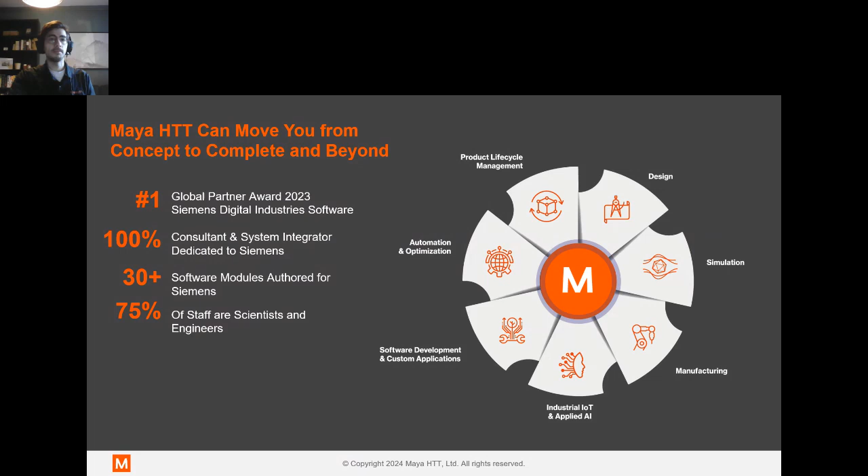In terms of Maya itself, over 75% of our team are actually scientists and engineers with a lot of hands-on experience that would span nearly every industry. So if you're an organization that's looking to better design, better simulate, improve your manufacturing processes, or just optimize your overall operations, our combined expertise in engineering software, software development, and our unique AI expertise positions us really well to help you move from concept to a completed project and even beyond that.

A little bit about myself. You already heard my name is Anthony Lorella. I have been a simulation specialist at Maya HTT since 2015. My background is in mechatronics and system simulation, across multiple industries. I received my Bachelor's of Engineering from McGill University, which is in Montreal, Quebec, where I live now and where our Canadian headquarters is at Maya.

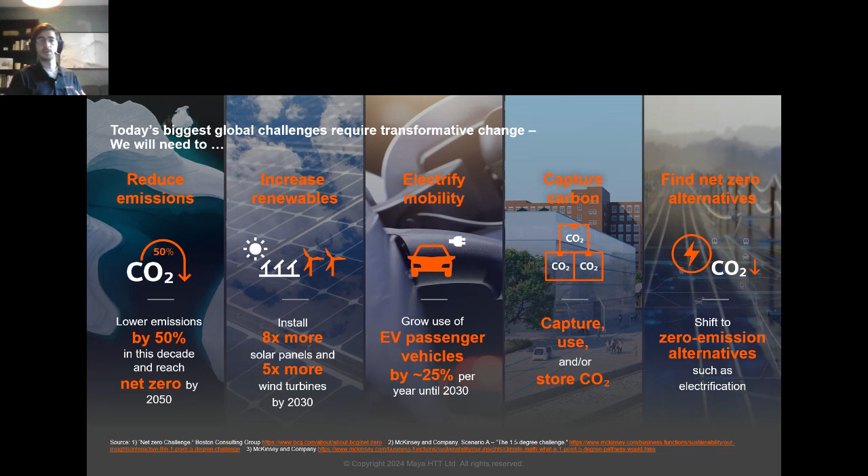Onto the topic of today's discussion. Generally, like I said, we're looking at the development of offshore assets specifically for the production of green hydrogen. As a lead into that topic, there are a lot of different motivations that bring us to explore different energy sources, from reducing emissions to de-risking operations and saving on operating costs. For all of those things, simulation has a part to play and can allow us to innovate.

One of the main goals of simulation is to increase the efficiency of the design process and allow engineers and analysts to understand the behavior of their system early in the cycle and make informed decisions. Ultimately, the end effect of that process would be reducing things like capital expenditure in building and commissioning equipment, but also reducing overall operating expenditure from running it. We'll have a look at how that comes into play in just a second.

In order to generate this green energy, the green hydrogen we're talking about, specifically green hydrogen being the one coming from renewable sources, several sources can be considered. We have things like wind turbines, solar panels, maybe some less common like wave converters. To improve efficiency, these different energy sources can be mixed together to improve both performance and reliability. This energy can be used directly, but the power demand of production doesn't necessarily always correspond to the fluctuating power coming in from those sources. Obviously, all of those are dependent on weather patterns, so they are not going to be consistent.

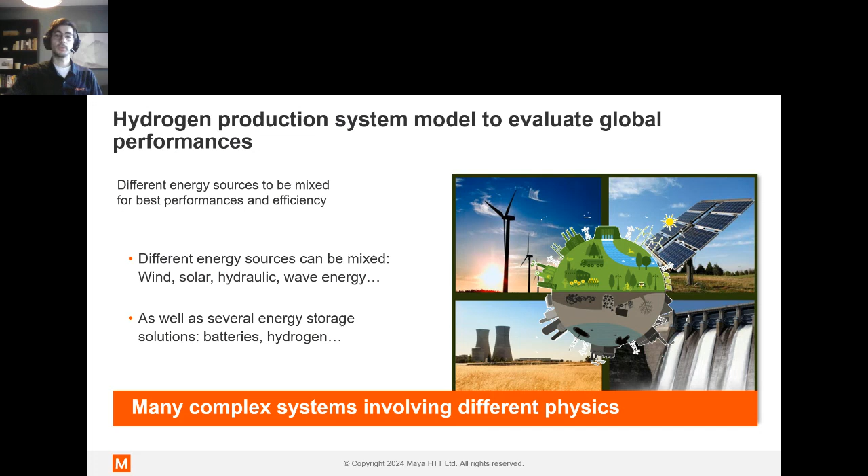But energy storage is also possible. For this purpose, we're going to be using an electrolyzer to produce hydrogen and then also a system to pressurize and store it for later usage. So from end to end, those are the systems that we'll be looking at today.

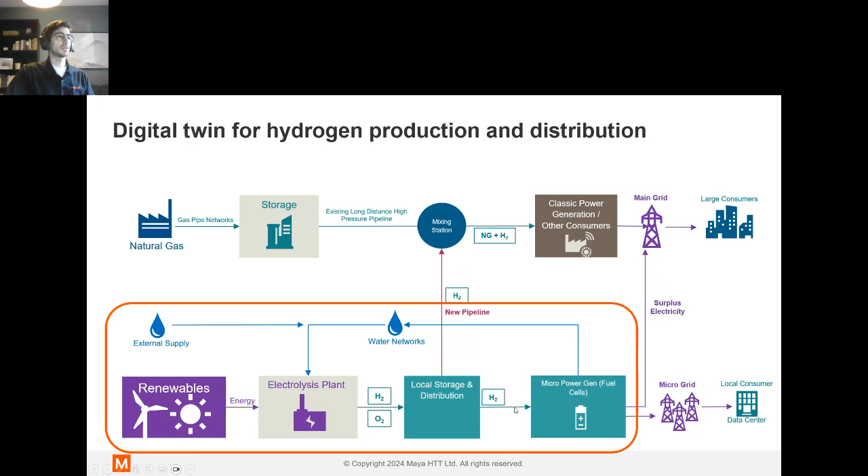In terms of what we describe as a digital twin, we could pretty much extend the capabilities of simulation to all parts of the hydrogen production and distribution process. But really our main focus is going to be everything in the orange box that you see here, up to and not necessarily including the micro scale power generation, like fuel cells or things like that, whether those are transportation based or stationary. So more like the boxes you see here, up to and including storage and distribution.

So, like I said, we're using multiple energy sources. We're combining with electrolysis and hydrogen compression. This makes the system, or the part of the system that we've framed in our question here, quite complex, and it involves a lot of different physics.

That's typically an application where simulation can become very useful. We can capture the behavior of each subsystem in order to better integrate and control them. The idea would be to predict interactions and improve the global performance.

There's a lot more that we can consider, but you get the idea from some of these questions, and these are all questions that ultimately can lead to being answered by a simulation model.

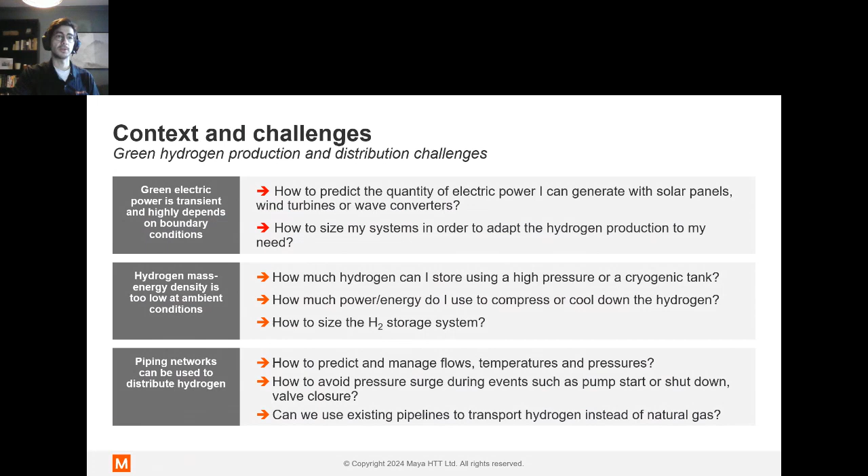So the models themselves are dynamic and complex. That's kind of what it boils down to. When we look at systems simulation, they're very well suited to dynamic and complex systems. And when I say complex, what I mean is multi-physics.

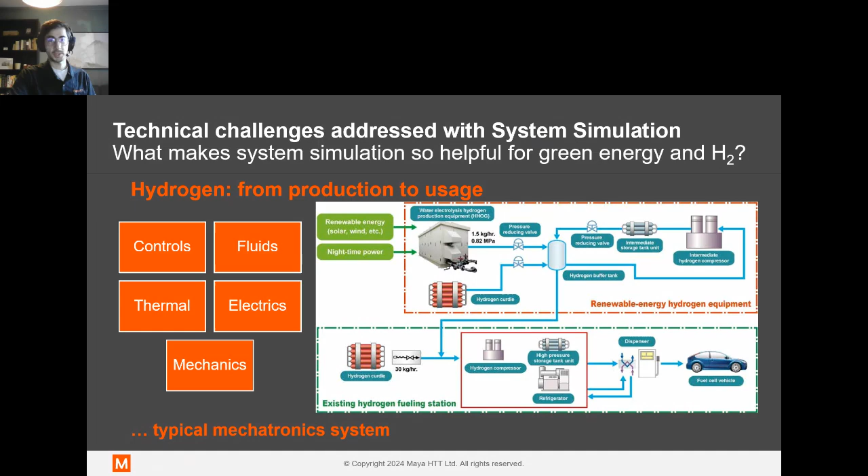So when we talk about system simulation, or sometimes referred to as 1D simulation, we are talking about usually the intersection of a lot of different physics. In this case, for example, we're looking at fluids, thermal, electrics, mechanical systems as well, and also the controls that will go in and form all of those.

So there's a lot of challenges with that, but system simulation is positioned very well to answer all of those challenges. Obviously, we have the ability to combine all of these physics in one model. The way we do this specifically with our system simulation tools is using ready to use off the shelf components that are validated by the developers and engineers. And those span various libraries, which we'll see in just a second.

The models themselves are, like I said, dynamic in nature. So those are off the shelf components which have the equations of physics behind them, and those are the transient behavior equations of physics for all of the different components that you would need across those different physics domains. There's also handy post-processing tools that allow you to go and, after an analysis, make a good informed decision on the overall behavior of the system.

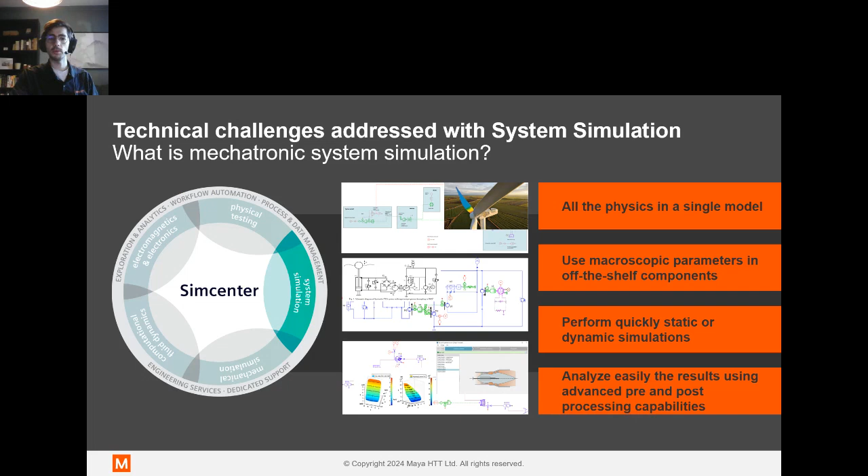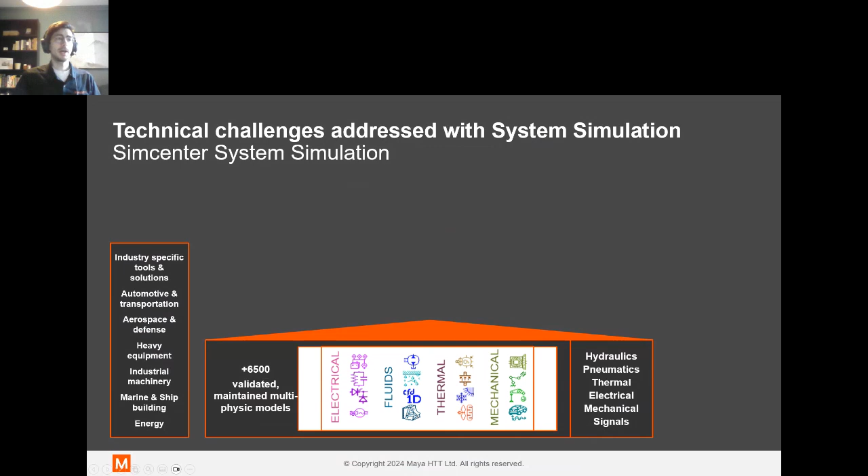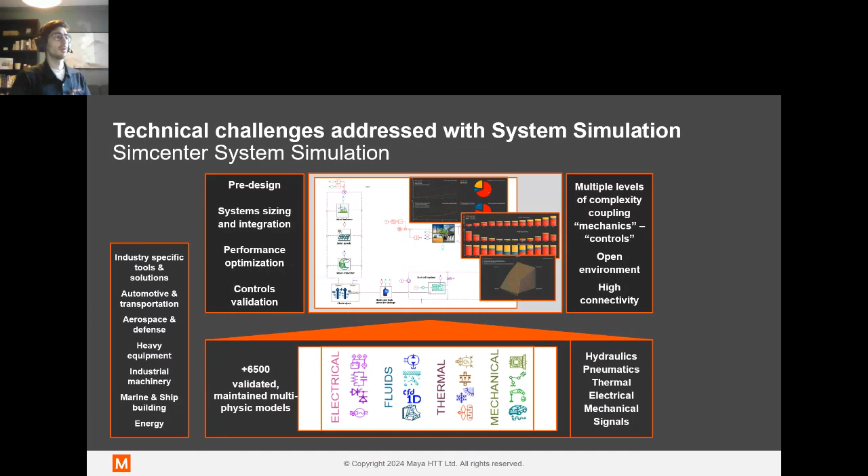And within them, we have over 6,000 validated multi-physics models that you can use and put together to build pretty much anything. There are different levels of complexity, so this can be used at multiple points in a project at different levels of maturity, for either pre-design all the way down to performance optimization and controls validation.

And then there are a few extended uses, things like interfacing with other code like CFD. The PLC interface capability makes it possible to couple these system simulation models with PLC or automation code, either in a software in the loop or hardware in the loop environment, depending if you have a real or emulated PLC that you need to virtually validate. There's a lot of other interfaces and capabilities, but those are some of the bigger ones that we can cover in a bit more detail in just a second.

So onto the model that we're talking about, for the purposes of the green hydrogen production. In this case, this is a large-scale overview of all the different subcomponents that are in our offshore hydrogen production asset. This one includes, like I said, 3 different green energy sources: wind turbines, solar panels, and the wave converter. These are feeding power to an electrolyzer, and then that will produce hydrogen, which will go to our pressurization and storage subsystem. Our focus will be on the 3 energy sources and how they behave, and how, in the end, those can influence the production of hydrogen overall.

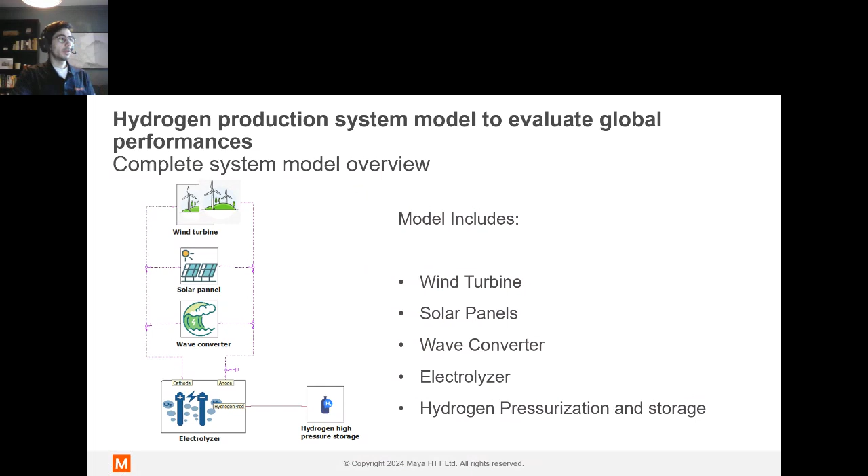This subcomponent allows you to predict the energy or power generated by capturing the energy of the wind. In terms of what we can model and use, this allows us to define the number of wind turbines we want to use, the definition of the overall geometry, things like fan diameter, pitch angle, gear ratio if we need it.

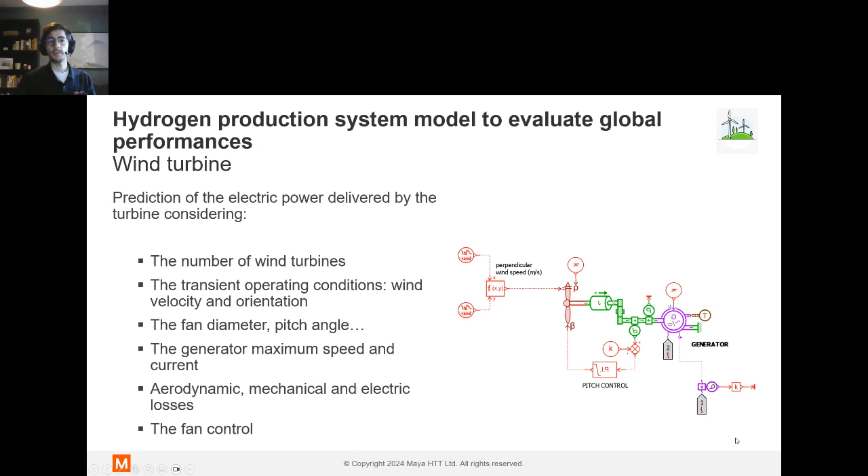You can see a number of other things I could highlight, like the color coding of the different physics in the models, and that carries over to the other subsystems as well. But these are all built from off-the-shelf components that we have across the different physics libraries in our system simulation tool.

The models, like I said, are transient in nature. So what we can do here is not only consider the composition of the solar panel, in terms of how many cells and how many panels exist in an array, but also the emissivity of the surface, and most importantly, the changing position of the sun over time, which we can simulate based on the data within this tool.

So we have the ability to predict, based on time and position, the overall incidence angle of the sun with the panel.

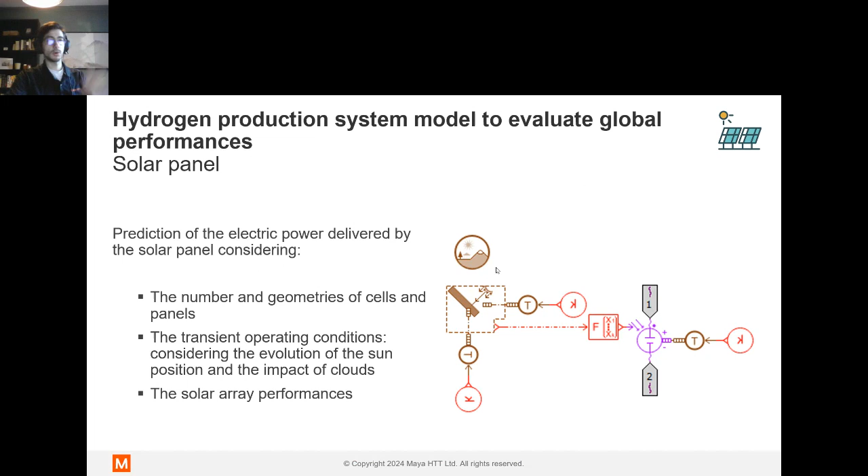Lastly, we can look at the wave converter. The wave converter is a bit more of a complex system, but it mostly contains hydraulic equipment in the fluid domain, and that's a library we also master quite well. So things like pistons, valves, the hydraulic motor, ultimately everything feeding and connecting to the generator, and all the different hydraulic equipment is also modeled using our off-the-shelf components.

But this is a much more detailed architecture, something we still master quite well in system simulation, allowing us to capture the transient operating conditions from the wave patterns, that being wave frequency and wave geometry.

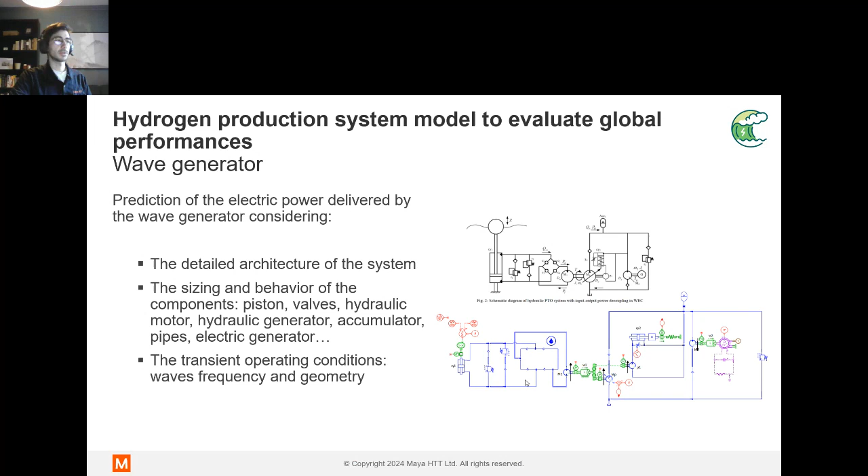So if we put all of these together and connect them to the electrolyzer and the storage, as well as give it some weather patterns that we can grab from anywhere and import into the model, we can make predictions in terms of the annual performance of the overall system, both in energy storage, and also energy consumption of the electrolyzer and overall hydrogen production.

And like I said, these are system models, or 1D models, so they're quite lightweight and the simulation is very efficient. That means these simulations themselves actually only take on the order of seconds to minutes to simulate what is effectively an entire year's worth of operation.

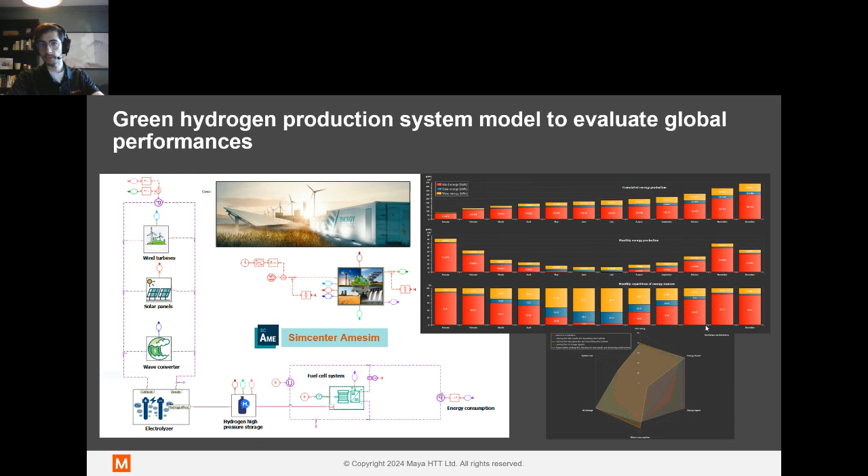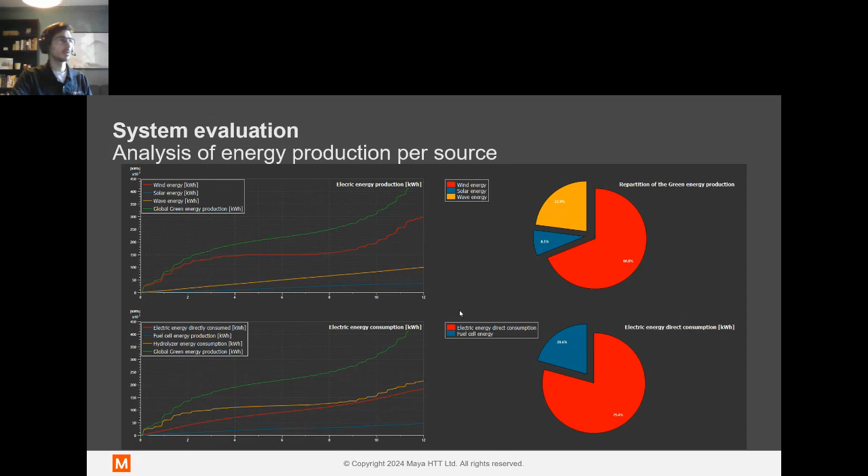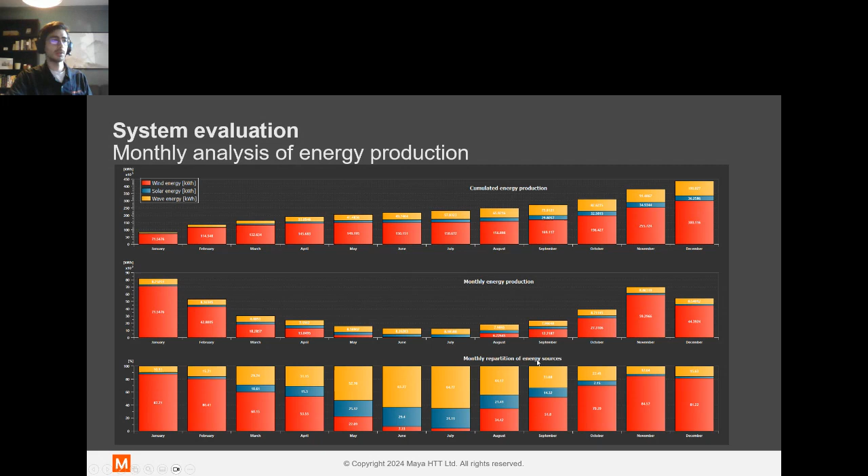And then we can use that post-processing I was talking about to make informed decisions on things like the overall contributor to green energy production. In this case, we could see here wind energy is the winner overall, but we also have more detailed reporting that allows us to see that although wind energy is the overall winner, different months of the year we actually have different energy sources that are the larger contributor. So that's important for our understanding of how the system operates and what the critical parts are.

Likewise, because these models are quick to run, we have the ability to simulate multiple different changes or multiple architectures. So in this case, we could see overlapping performance spider charts of different system architectures based on criteria like energy import, hydrogen storage, and the CO2 rating, and even cost if we were interested in modeling the cost of the system.

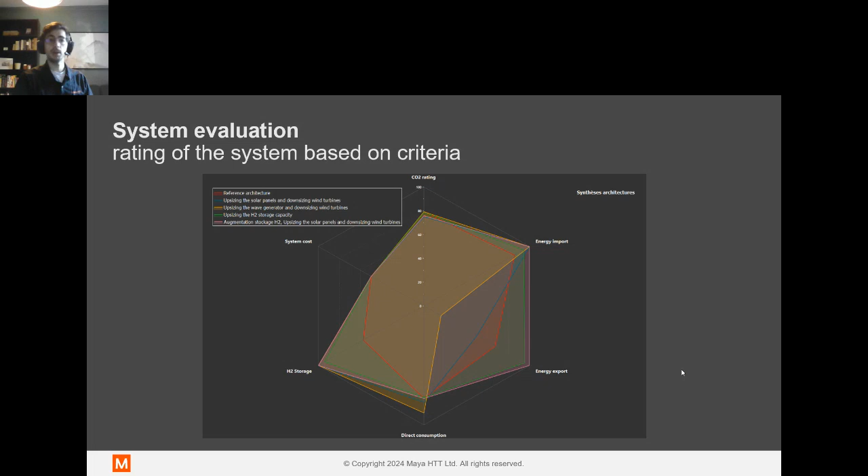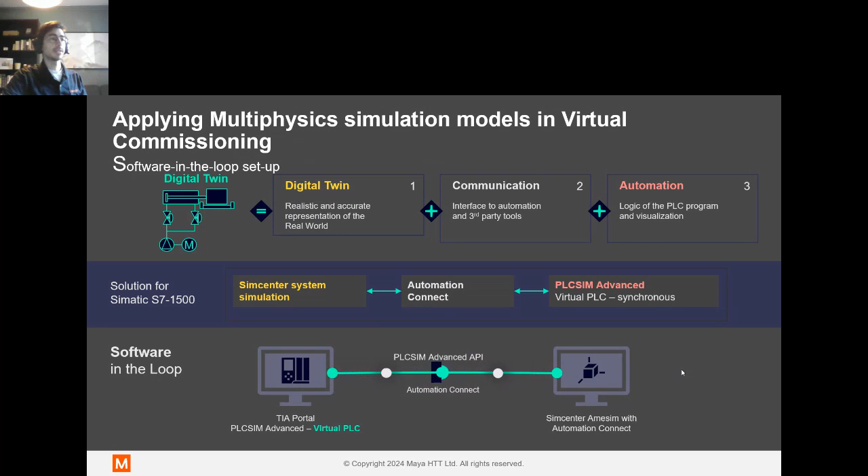Extending the uses a little bit, I talked about the ability to connect with PLC, and that's certainly a capability of these models. They allow us to do what we call virtual commissioning, where we connect either emulated or real controls code on hardware or on a computer against a virtual version of the plant, where we can do some commissioning before we even bring things up and running on the field, which can save us costly downtime and save us on the actual physical commissioning time.

Likewise, another extended feature of models like these is the ability to act as virtual sensors for remote monitoring of equipment. The simulation models can be configured to take in real-time data from the field, be fed into the model, and make predictions as far as performance of components that do not otherwise have sensors outfitted to them. That could be because it's too intrusive or just plain costly to put sensors in. These models will be able to give us predictions of the state of various equipment.

Not only that, but if we want to use web-based monitoring tools, these can act as what we call an executable digital twin, allowing us to make predictions based on the simulated future state of the equipment.

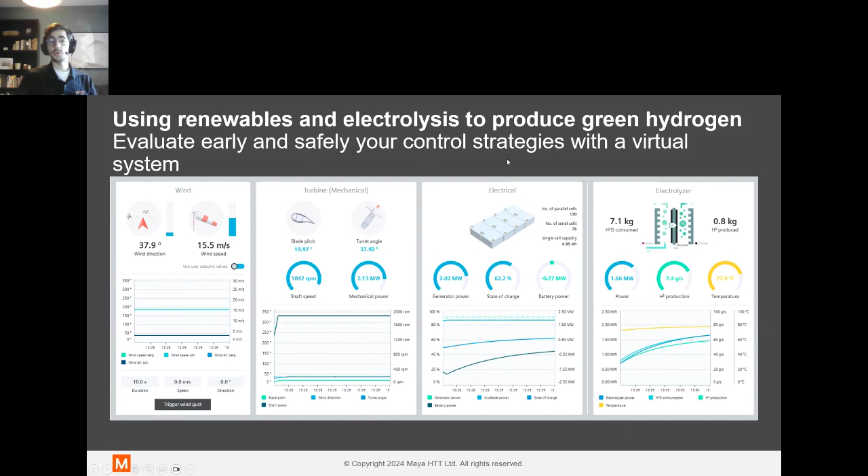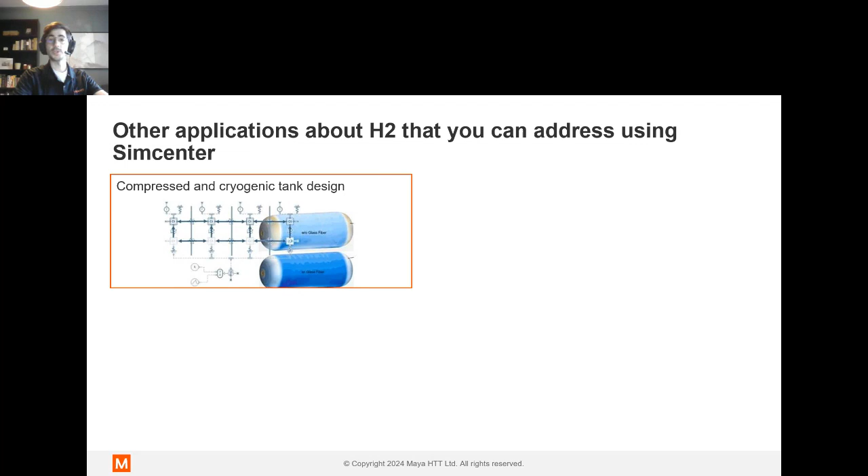Finally, there's a lot of different other applications that we can get into for system simulation, things like modeling compressed and cryogenic storage tanks, aero gas turbine performance for hydrogen-based gas turbines. Likewise for combustion engines, the actual combustion process, the after treatment, the injection of the hydrogen, and also very importantly, the design and analysis of the fuel cells, which are actually going to consume this hydrogen and generate the power later on.

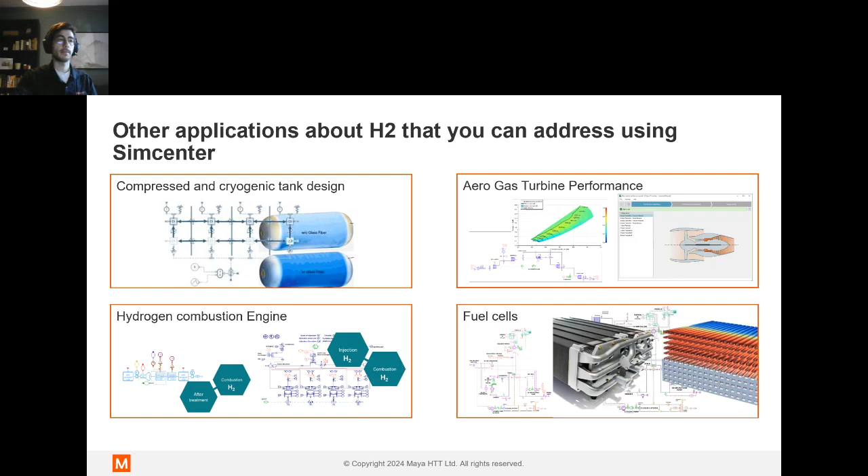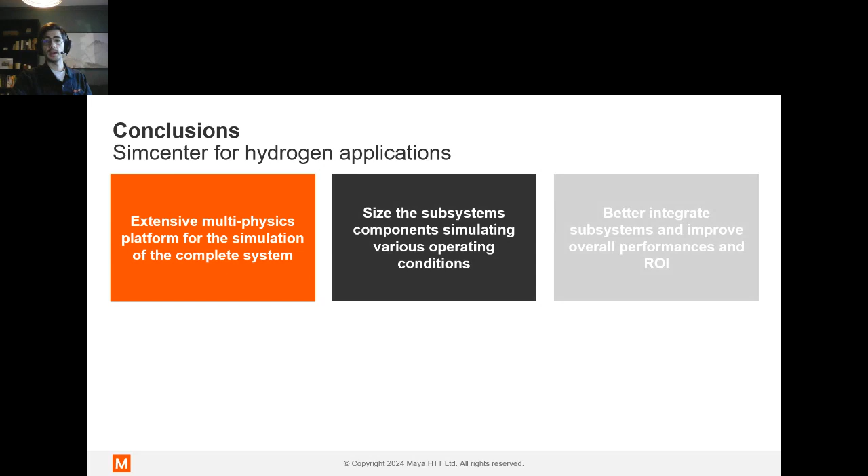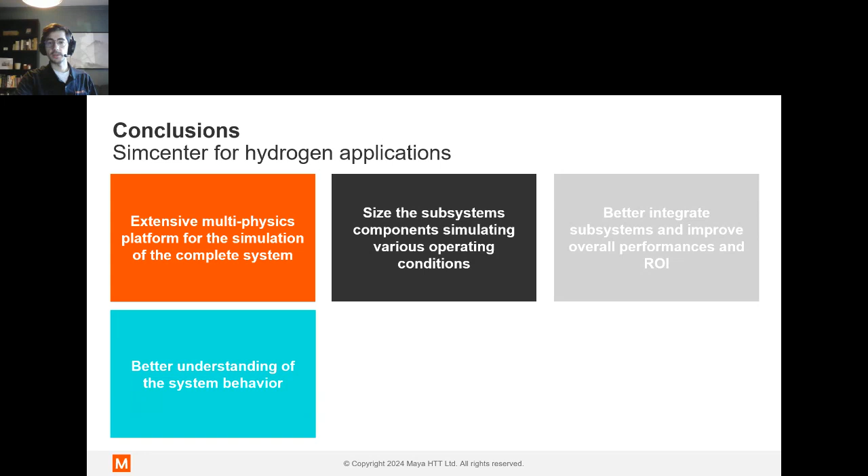So just to conclude here, we looked at system simulation specifically to help address challenges of green hydrogen production. Those multi-physics libraries make it possible to model the whole system, allowing us to size the subsystems and understand the operation of them. We can better integrate them together because all of those physics can be modeled in one system, allowing us to get a better understanding in terms of overall behavior, but also the post-processing can let us make very good use of the data to understand more minute operating details.

And then also we can evaluate virtually control strategies via the PLC connection that I was talking about. Finally, all of this obviously allows us to do things like reducing the amount of iteration, selecting the best design on the first try, reducing risks, and accelerating a project overall.